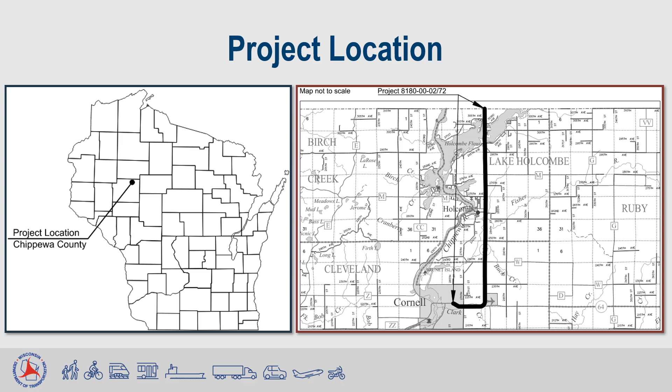The existing pavement for Wisconsin 27 is showing signs of deterioration in various forms of cracking and rutting. This deterioration causes poor ride quality, presents safety concerns, and is unsightly.

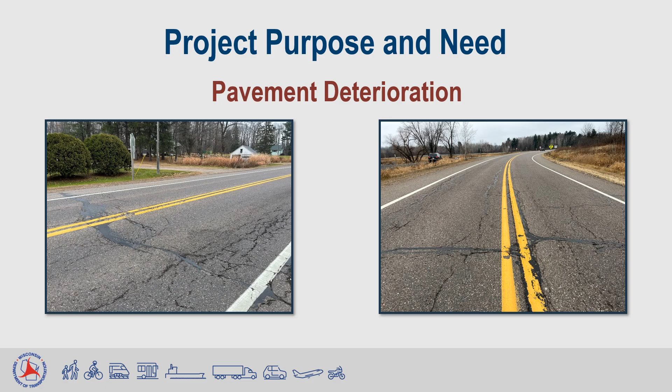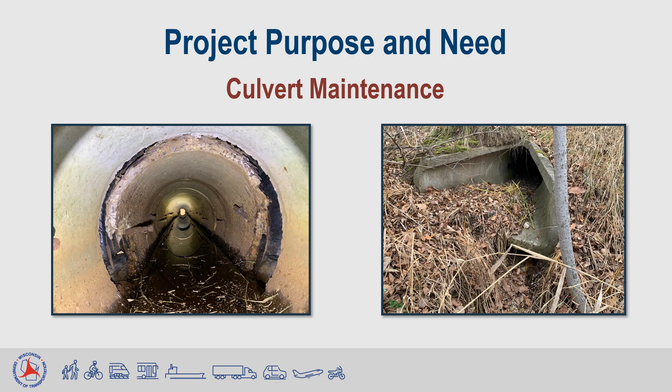Culverts throughout the Wisconsin 27 corridor need to be repaired or replaced to improve drainage and reduce chances of standing water. Existing culvert pipes under Wisconsin 27 are showing signs of deterioration. Several are experiencing corrosion, joint separation, and damaged or missing end walls, which reduce both the structural integrity of the pipe and hinder the pipe's ability to convey flow.

The existing culvert structure that carries Buck Creek under Wisconsin 27 is exhibiting signs of deterioration. The structure has corrosion of the metal arch pipe with some section loss and cracking and spalling of the concrete headwalls. These issues, if not addressed, can cause further deterioration of the existing structure and leave potential hazards such as failure of the concrete headwalls.

The existing guardrail is outdated and doesn't meet current standards for roadside design.

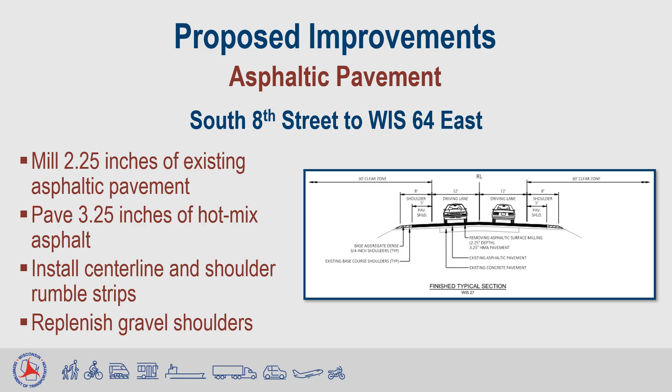Pavement resurfacing from the beginning of the project to Wisconsin 64 East would include milling 2.25 inches of the existing asphaltic pavement and overlaying the roadway with 3.25 inches of hot mix asphalt. Additionally, centerline and shoulder rumble strips will be installed and gravel shoulders will be replenished to improve the safety of the traveling public.

Resurfacing the existing pavement from Wisconsin 64 East to the Holcombe Flowage Bridge would include milling 1.25 inches of the pavement surface, recycling the pavement on site, mixing it with stabilizing agents, and overlaying the roadway with 2.75 inches of hot mix asphalt. Additionally, centerline and shoulder rumble strips will be installed, and gravel shoulders will be replenished.

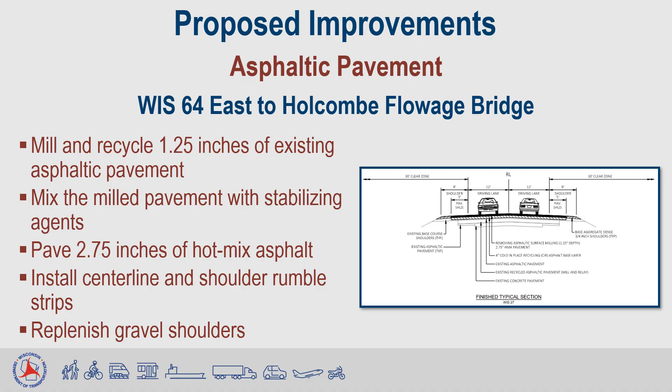Resurfacing the existing pavement from the Holcombe Flowage Bridge to the end of the project limits would include milling 3.25 inches of the existing asphaltic pavement and paving 3.25 inches of hot mix asphalt. Additionally, centerline and shoulder rumble strips will be installed and gravel shoulders will be replenished.

There are several culvert pipes along the project that need work. Several culverts have accumulated sediment and will be cleaned. Overgrown ditches near the culvert ends will be cleaned to improve drainage toward the pipes.

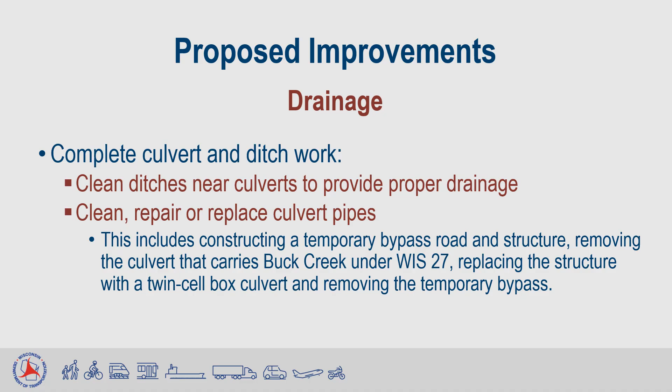The metal arch pipe culvert carrying Buck Creek under Wisconsin 27 will be replaced with a twin cell box culvert that is 8 feet high, 16 feet wide, and 94 feet long. A single lane temporary bypass road and structure will be built on the west side of Wisconsin 27 to allow for removal of the existing structure and the construction of the new culvert. The temporary bypass will be removed after construction of the new box culvert.

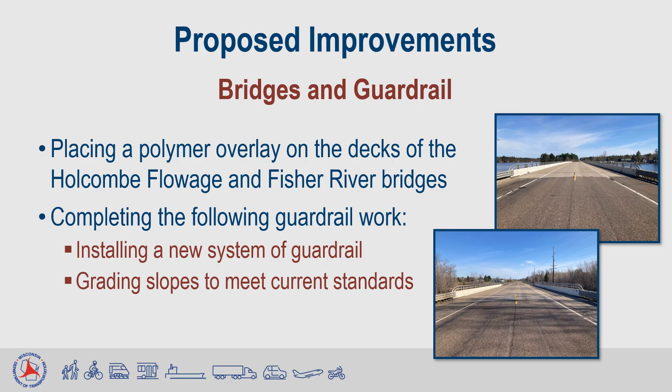During construction, the existing guardrail will be replaced with a new system and slopes will be graded to meet current standards. In addition, a polymer overlay will be applied to seal the decks on the bridges over the Holcombe Flowage and Fisher River. The project also includes making improvements to the WIS wayside and boat landing located adjacent to Wisconsin 27, north and south of 303rd Avenue.

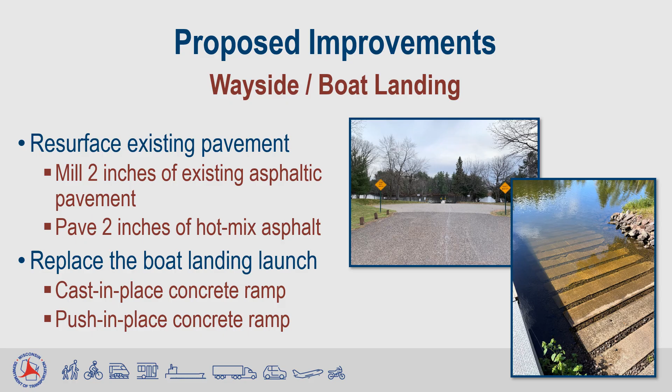2 inches of the existing asphalt pavement will be milled off and 2 inches of hot mix asphalt will be paved, and the boat landing launch will be replaced with a new cast-in-place concrete ramp constructed on land and pushed into place in the water.

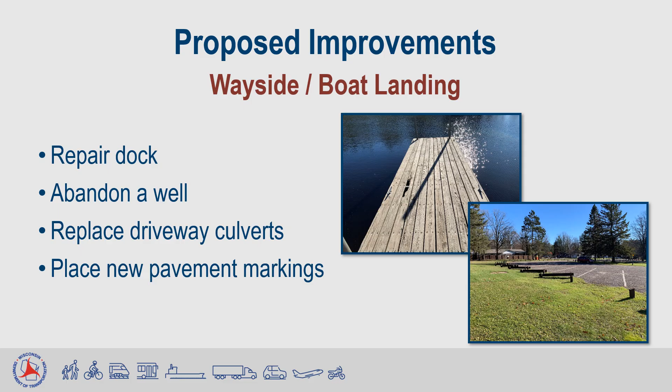Wayside and boat landing improvements also include repairing the dock, abandoning an existing well, replacing driveway culverts, and placing new pavement markings for parking.

The public can expect Wisconsin 27 to remain open to through traffic. Motorists can expect daytime single-lane closures controlled by flagging operations for pavement resurfacing, culvert work, and guardrail replacement. A moving flagging operation will be used during milling, pavement recycling, and paving operations, as traffic will be limited to one lane within the moving work zone. Additional flaggers will be provided at intersecting roadways when the work zone encompasses an intersection or multiple intersections.

Access to business and residential driveways will be maintained. However, single driveways will be temporarily closed for short periods of time when the milling, recycling, and paving operations are in the immediate vicinity of the driveway. When multiple driveways serve a single property, construction will be staged so at least one of the driveways remains open.

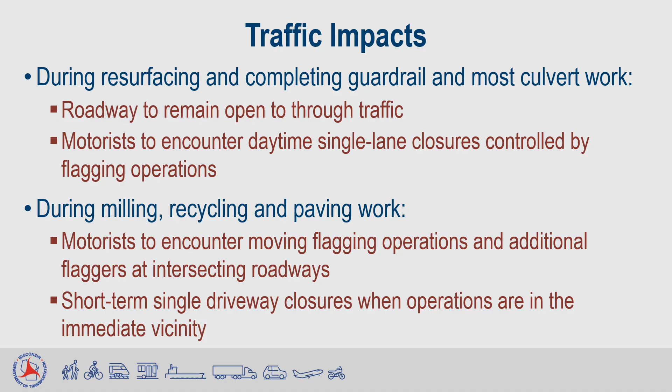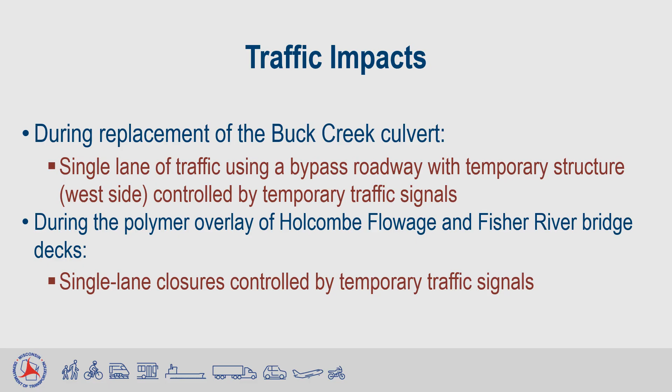Wisconsin 27 will remain open to a single lane of traffic during the replacement of the Buck Creek culvert, and motorists will use a temporary bypass built to the west of the existing structure and controlled by temporary traffic signals to get around the construction zone. The rehabilitation of Holcombe Flowage and Fisher River bridge decks also will be completed using single-lane closures controlled by temporary traffic signals.

Both fee and temporary limited easement needs have been identified by the project team. Fee is a permanent land purchase of a portion of property for highway needs. A temporary limited easement, or TLE, is a temporary land purchase of a portion of a property for construction needs, where any disturbed areas are restored during construction.

12 purchase needs, 5 fee and 7 TLEs, have been identified due to the replacement of the Buck Creek culvert and guardrail replacement locations. These are anticipated to be minor amounts of purchases and do not require property owner relocation or changes to existing access.

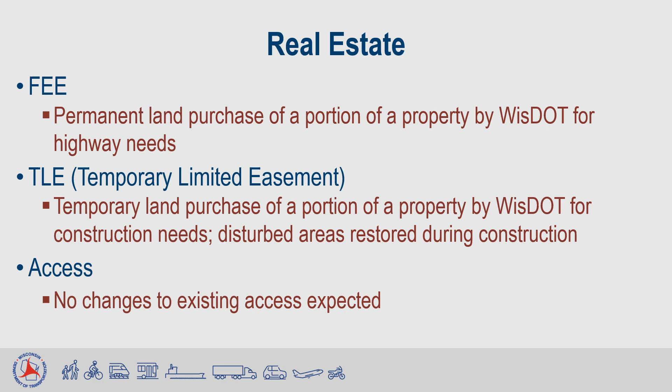The amount of anticipated purchase areas and purchase types are in the preliminary phases and will be finalized as the project team progresses through the design phase. If a property does require a real estate purchase, the property owner will be notified by a real estate specialist to begin the negotiation process. This is expected to begin in summer 2026.

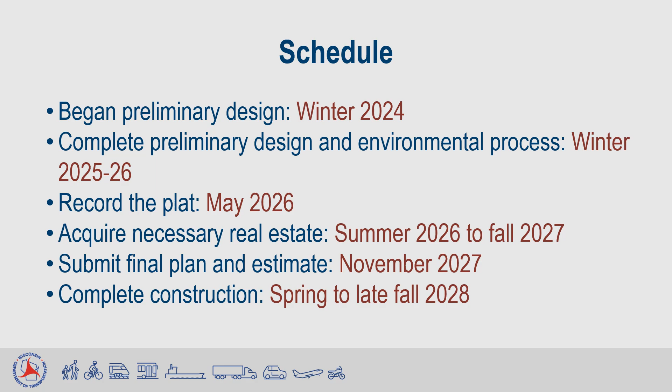Preliminary design began in winter of 2024. The preliminary design and environmental process is to be completed in winter 2025/26. A recorded plat for real estate needs is expected in May 2026, with acquisition of real estate to take place in summer 2026 through fall 2027. The plans for the project are currently scheduled to be finalized by November 2027, and construction of the project is currently scheduled for the 2028 construction season, starting in the spring and ending in late fall.